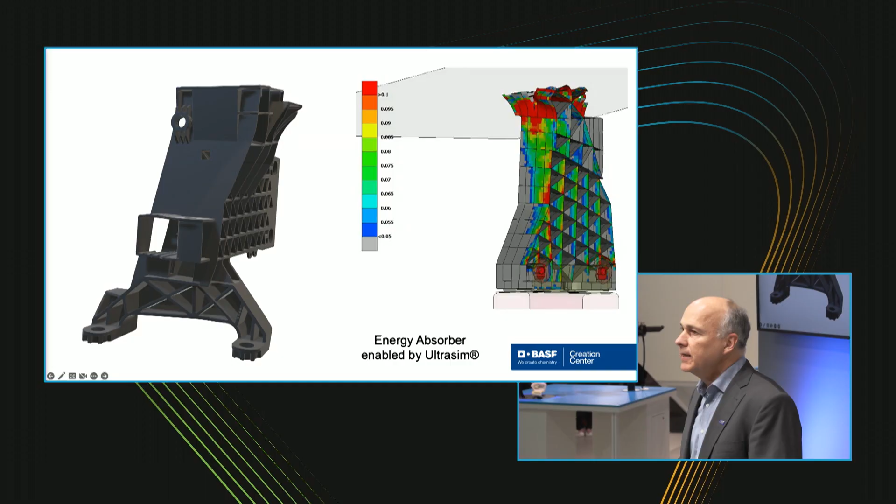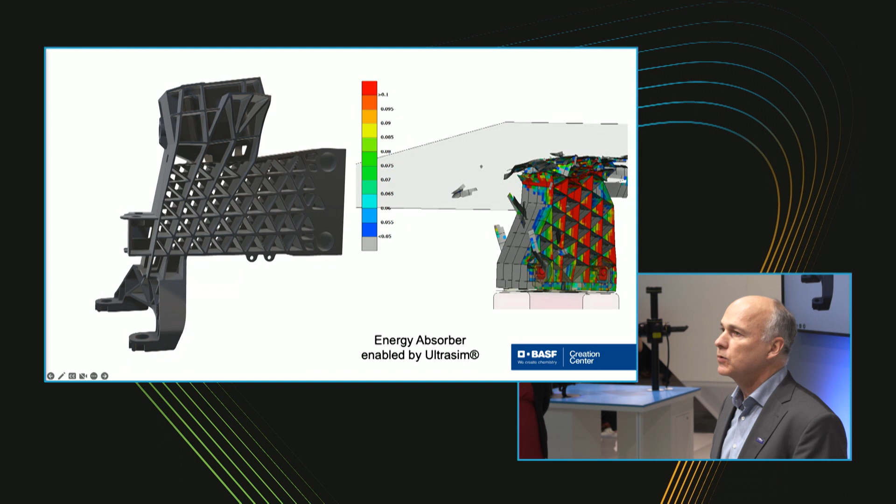If you look at this part here, which is an energy absorber of a passenger car, you see that the crash behavior here is quite complicated. You'll never get that with standard material models in the right way, so that you can predict the energy absorption and the failure and the force and everything. And this is only possible by Ultrasim. We did that together with a customer from the OEM industry and together with a Tier 1, where the Ultrasim software was installed at the customer and at the Tier 1 as well.

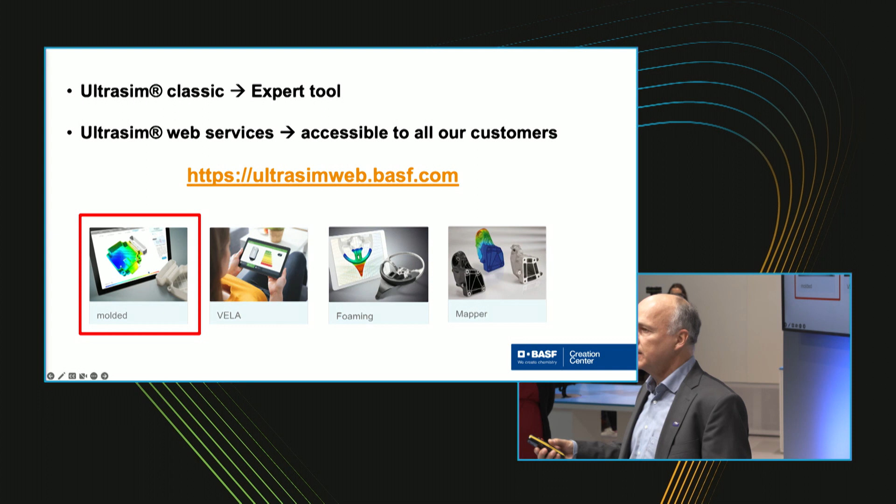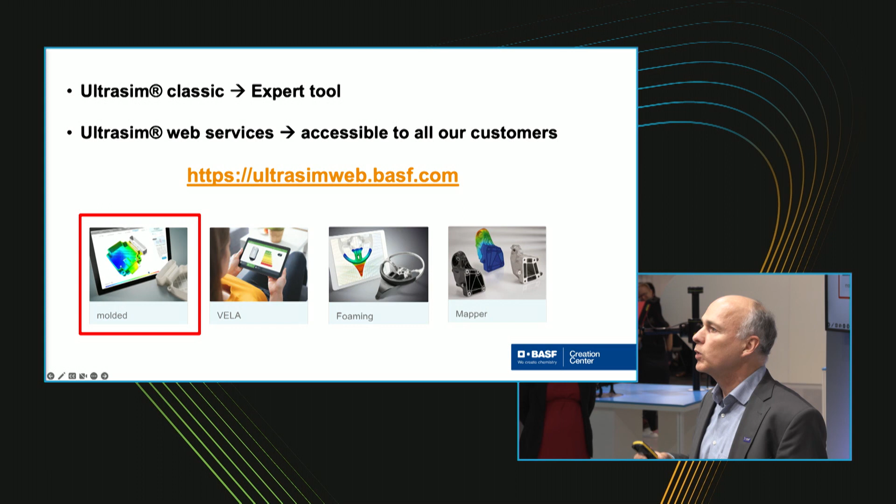But let's face it, Ultrasim Classic, as we call it now, is a tool for experts. You need finite element guys, you need the CAE guys, you need the computer nerds in order to do all those things. But this is now about to change. What we will present you in the next minutes is what we are doing in terms of putting Ultrasim on a new level, putting the Ultrasim technology and making it accessible.

Matthias. Thank you, Andreas. Please go one back here. I think Andreas convinced hopefully everybody that our simulation technology is really a proven and valuable tool to make successful plastics parts. We are of course continuously improving it, but the most important thing is that our customers are actually able to use it in basically all of their projects. So now the big step is, how can we make this technology available to as many customers and as many part projects as possible? The first step is that we take this from an expert tool to an online tool, where all of our customers can register and do their projects on their own.

The other important thing is we also have to make small, easy to use apps, so that not only the experts, but everybody involved in this part development process can actually use it. So we want to really target not just the CAE engineers, but one step earlier, everybody who thinks about a plastics design should be able to use it. How easy should it be? It should be as easy as upload your part design, press a button, run the simulation, see the results, analyze the results, ask your colleagues for help, ask our support for help, and then take a decision if you need a change or if this is going to be a successful design.

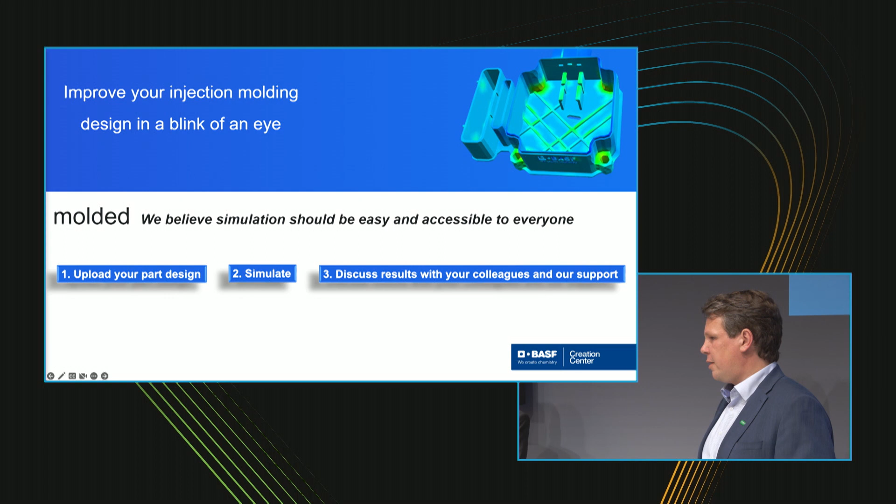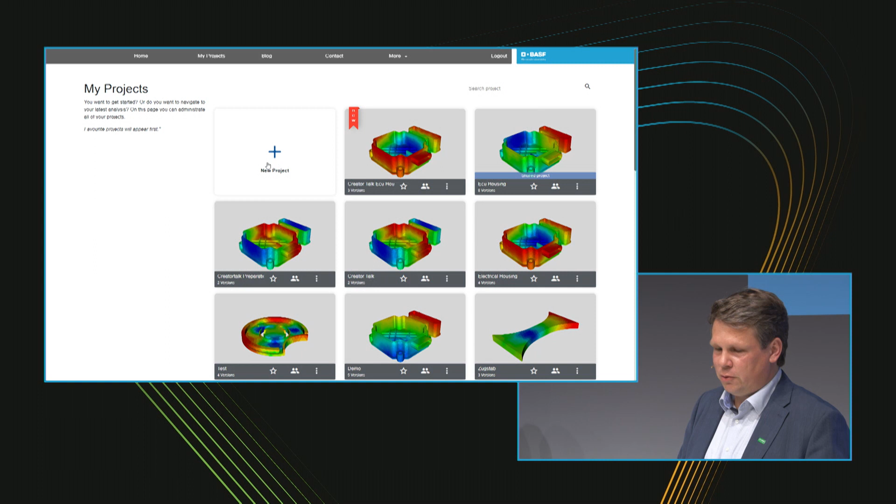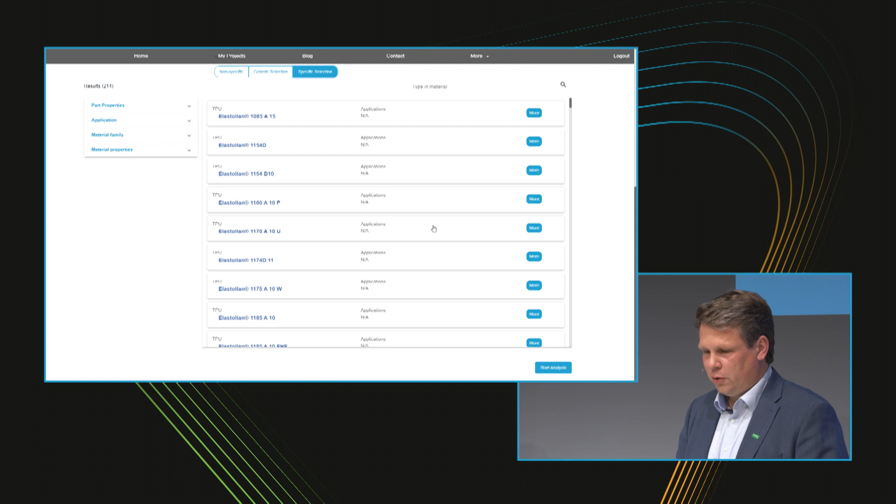So let's now do some reality check if our tool is as easy to use and quick as we promised here. This is now a live demo in the internet. This is when you log in. It's our dashboard where you see your current projects. Let's now try to start a new part project. We simply start it, give it a title, then we upload our geometry, push it through the internet here. Now you can see we already have a preview. It's an electronic housing. If we want, we can already set some injection location or put it to auto. Then we can select some material from our portfolio. There's a comprehensive material database in there.

So Matthias, all that is now really happening online, and not just something prepared locally? Yeah. It's on the cloud. Exactly. This is happening right now in the internet, running on a European Azure server. The only thing that you need is a modern browser, your CAD file, your idea, and then you can already get started. So this runs in Chrome, in Edge, whatever? Whatever you have, the common technology.

Matthias, what is happening with the data that the customer uploads? Of course the ideas of our customers are of the biggest value for us. If you upload something, you are the only person who can actually see it, and you have full control over your data. You can control if you want to share your part with a colleague or ask our support, but it's not shared with anyone if you don't ask for it.

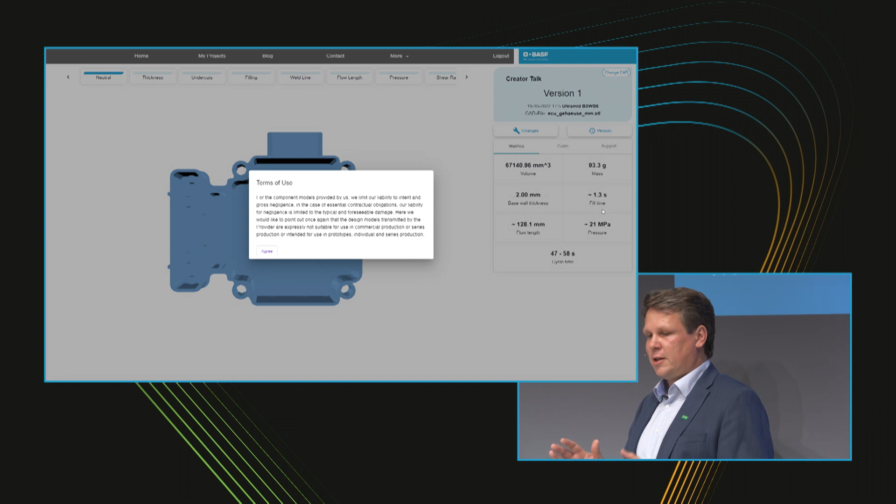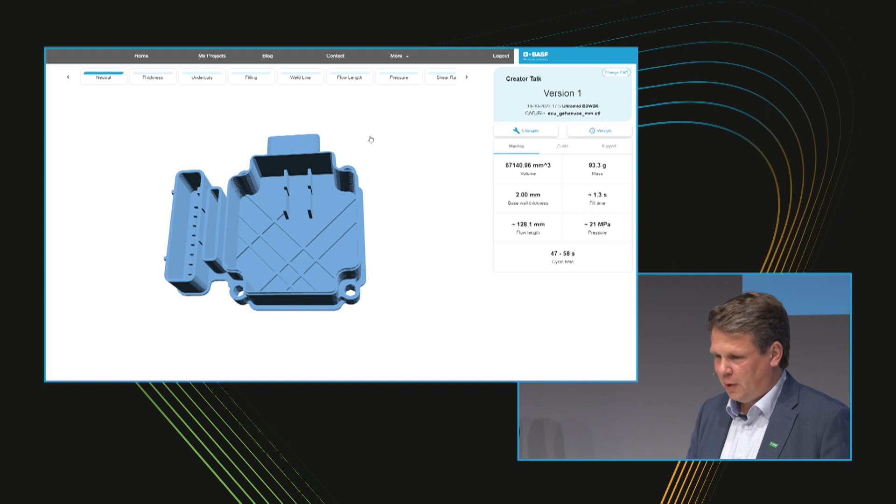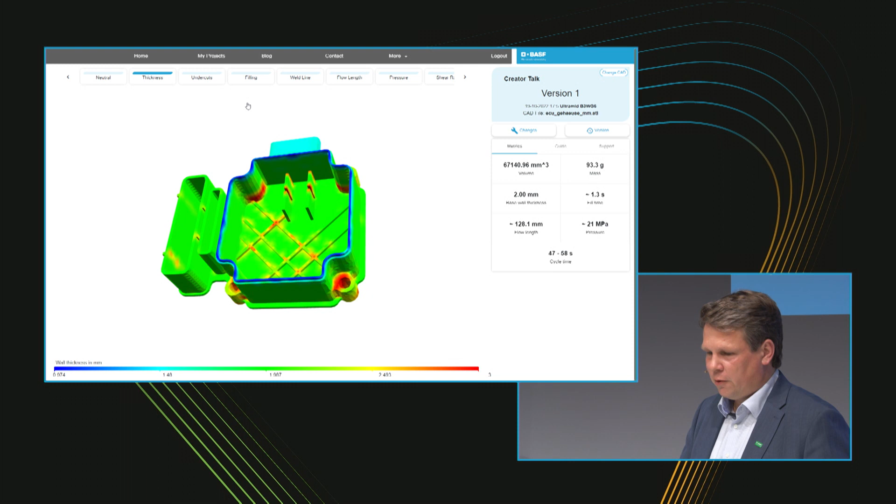So now it's already run? Yeah, we can see the first simulation was already conducted here. For example, you can look at the thickness distribution of the part. The thickness might be important for avoiding higher cycle times because of mass accumulation. We already get some estimates here for things like fill time, cycle time, pressure requirements, flow lengths. And very important, we can directly inspect the filling behavior of this part. So what about having some kind of guidance for the injection molding? Yeah, exactly. I think this is a very important topic because we want to offer this to non-experts.

So we have a built-in guide that tells you for the different results why it is important to look at it, what might be measures that you want to take. Yeah. Or if you cannot make a decision on your own, of course our technical support is only one click away. You can onboard him into the project, say please help me and give me your expert advice.

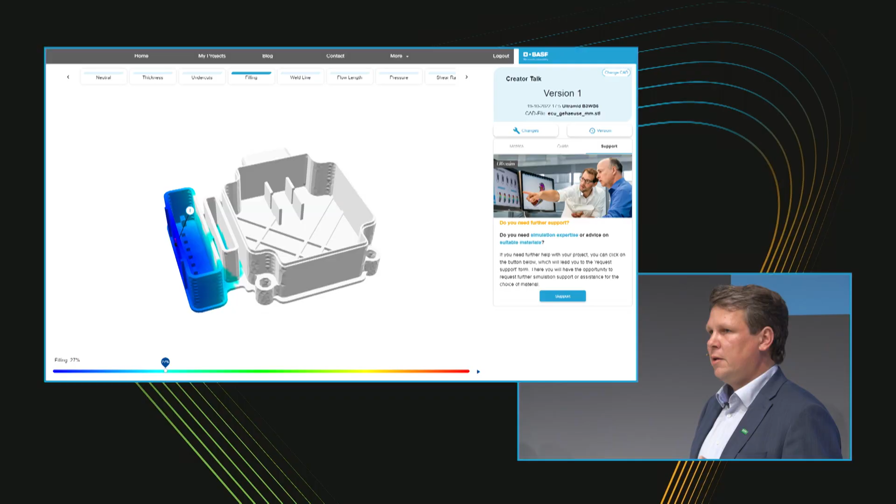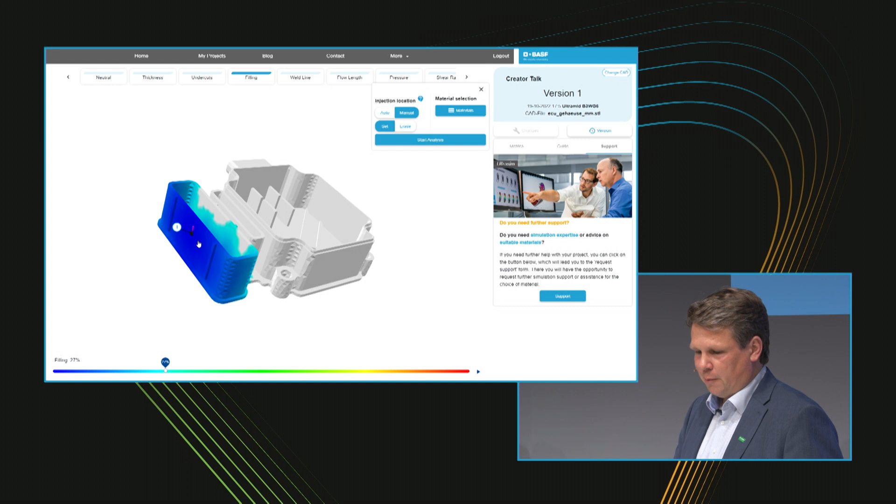Matthias, what about now trying to find out what happens if you have two gating points, for example? Let's try this out. Now we have this. So we simply put on here on changes. We want to put a manual injection location. We put here on one side, maybe on the opposite side. And we can simply run another simulation live here and hopefully get some result within a few seconds.

Yeah, there might be a weld line in the middle, which of course is for the mechanical performance a weak spot. So with those tools you can easily detect if there are some weak spots and see the weld lines. And as I can see on the upper line here, there is a weld line button, so we can also visualize this one. Yeah, so maybe let's have a look here on the weld line result. It's loading. Let's switch to weld line.

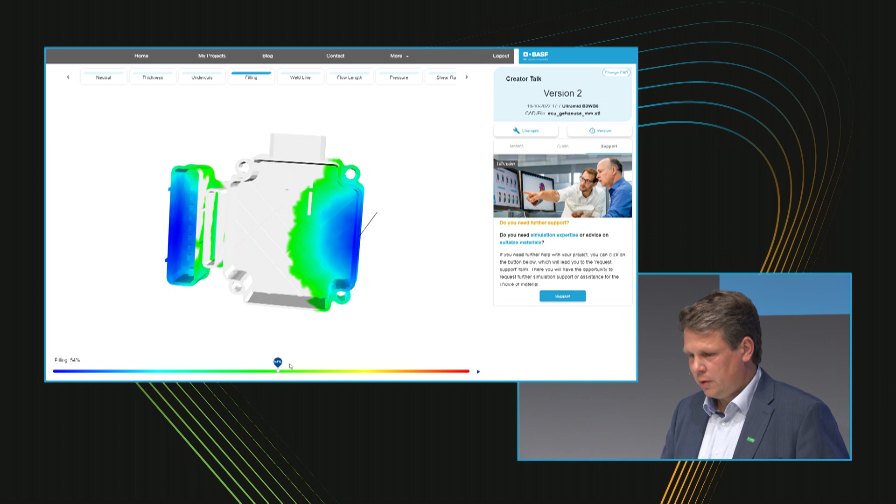Yeah. And as you correctly predicted, Andreas, we will have a big weld line here and some smaller weld lines here. We can also track this visually. It's clear to see. You can clearly see how the weld line is generated.

You talked about collaboration. What does that mean? Now, if I have done such a simulation, I want to share it with some other guy. So collaboration, I think, is a very important aspect here. It's not about a self-service tool, a cost-cutting tool. We really want to make collaboration easier. A collaboration between different project partners within our customer company, but also collaboration with our in-house experts.

Perfect. Let's have a look at more results here. Maybe we put the fiber orientation. This is something which is also important. In our Ultrasim tool, we use that fiber orientation approach in order to make better mechanical simulations, taking into account the anisotropy. And the molding tool has also some abilities to show the fiber orientation. And if you know about your mechanical results, then you can judge, hey, that could be a problem if you have the highest load and the highest stresses in the region where your fiber orientation may be disturbed.

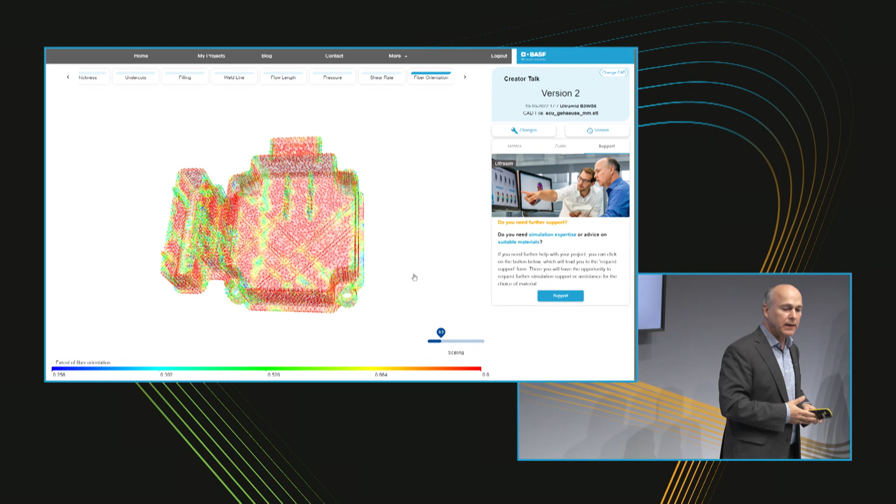But then, as Matthias already pointed out, you can click on the support button and we can have a look at those parts with a much higher accuracy with our Ultrasim Classic tool, by clicking on support and telling us the problem that you have with that part. And it's definitely some result you want to keep in mind for one minute because it is a complicated result. You just cannot look at it and then see what is the fiber orientation. It's a tricky result, but we will learn in a minute what you can use and what you can do with this result actually.

Okay. So let's switch back. Exactly. So now, of course, the question is, injection molded parts are not covering all of our material portfolio. Our portfolio has at least two sides, like this shoe here. It's an injection molded TPU, but it's also some foamed PU system sole here on the top. And the thing is, what we showed you now is the first app that we have here, but there are more, and there are more to come.

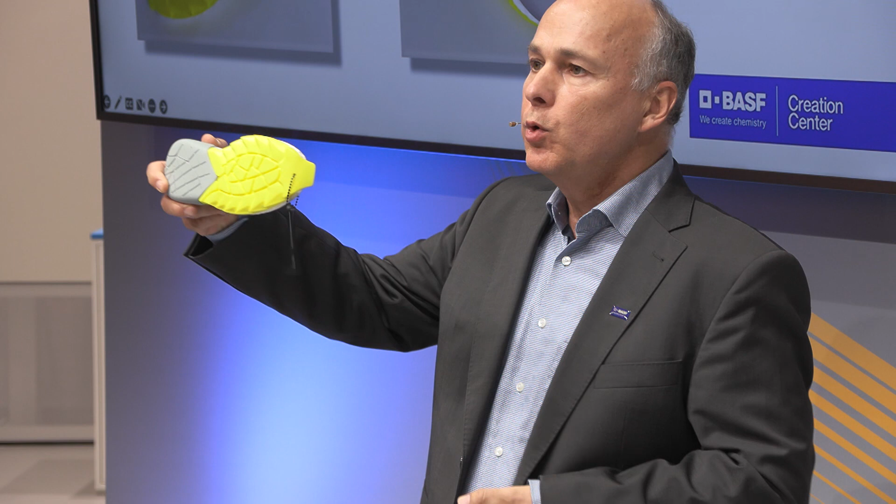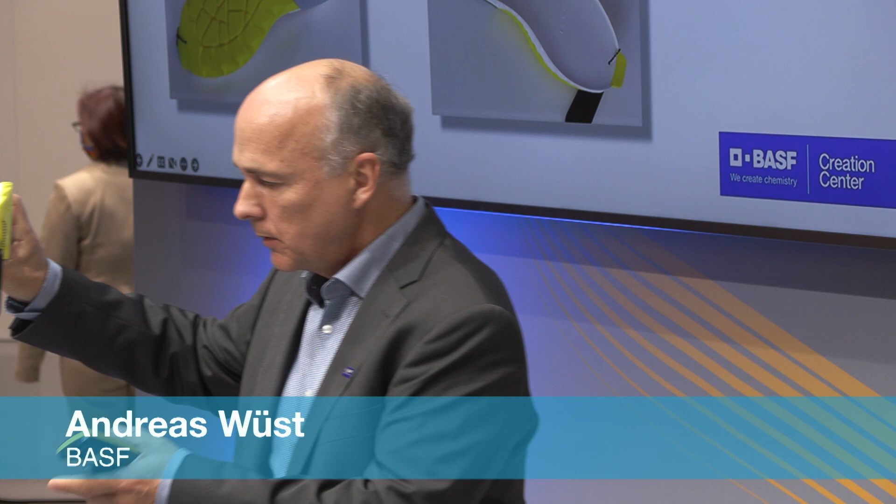And this, I think, is a nice example because this is the molded side, basically, and the other side is made from a foam. You can also use the foaming app, which is available on our web portal, in order to look what the foaming can do and to help you avoid mistakes with the foaming process in early stages.

Exactly. And when you remember what Andreas told earlier, there basically is the one side of doing the processing right, but then also predicting how this process and the part design give you some final part performance. And of course, we also created an app for this.